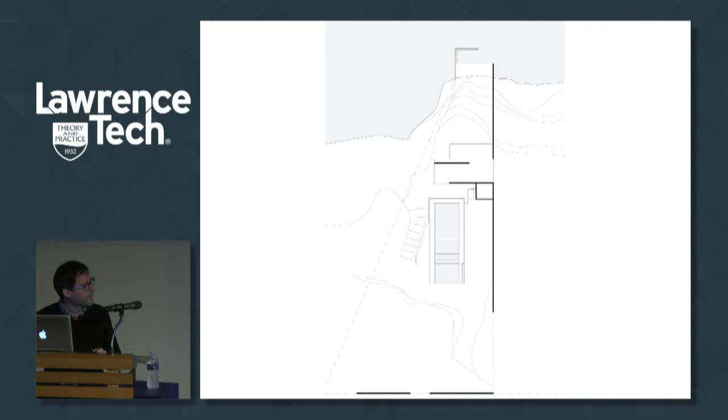And this was the first time that an architectural work engaged with topography, because we're a flat land, and suddenly to start seeing those drawings at the edge of the cliff, basically, it was extremely new for us.

And this is the same year, or actually previous work by Gerardo Caballero, that he did this work coming from WashU. He did his master at Washington University in St. Louis, and he came with this land art sensibility of topography, and that was like a shock for us.

So I'm going to show you the first of my works. I was still at school when there was this opportunity for a competition to reframe what used to be industrial port facilities into a new park, for the city to stop giving the back to the river and start actually using that landscape.

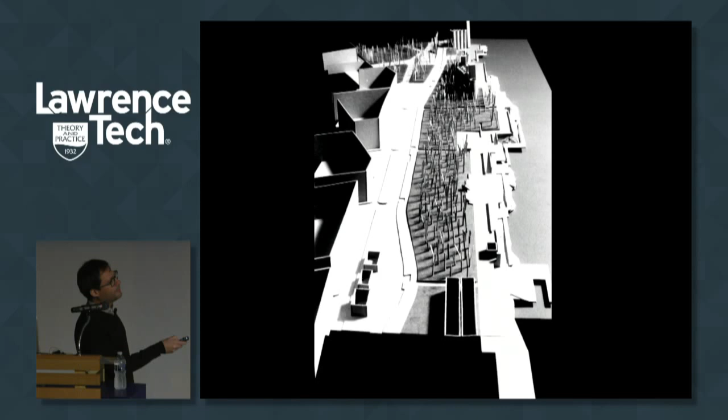And we proposed some kind of surreal scenario of a forest that will frame our relationship with the horizon. And the 5 restaurants they asked for, we put underground. This was let's say the frontal image of what we were thinking, and we were thinking to create a sense of suspense with slight topographic manipulations to separate yourself from the landscape.

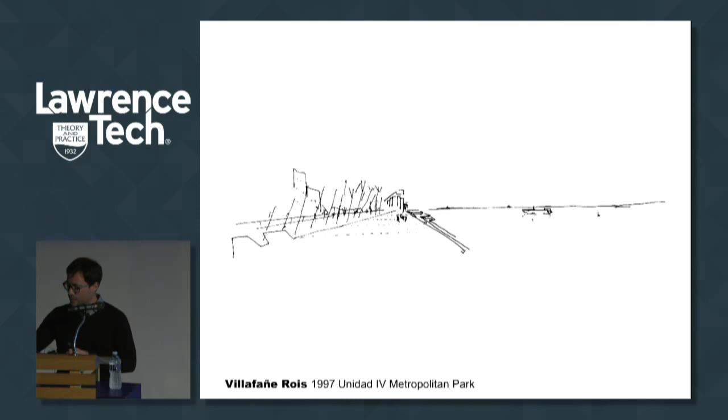So when you are already in the coast, you think you are in a different condition, and you put your body in a clear relationship with the horizon. And this was some silos we wanted to maintain. The city turned them down. We went into the papers and tried to stop them, but it didn't work its way through.

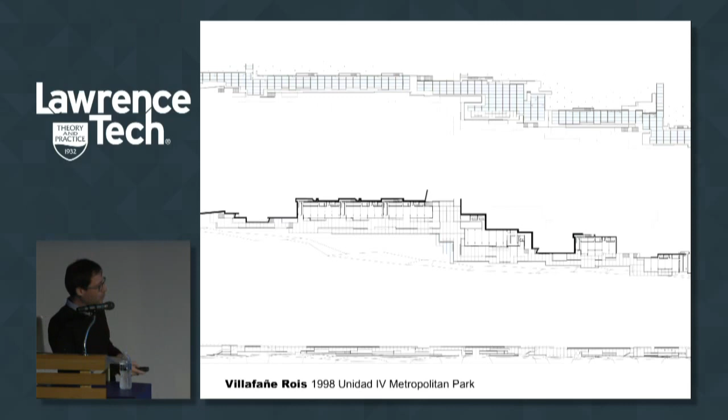This is a very long drawing that I did, still by hand, and this was actually longer than the table. This is the intense work that you do when you do a competition, that you just spend 2 months working on that. We happened to win that competition, and then we worked for 1 year developing the construction documents.

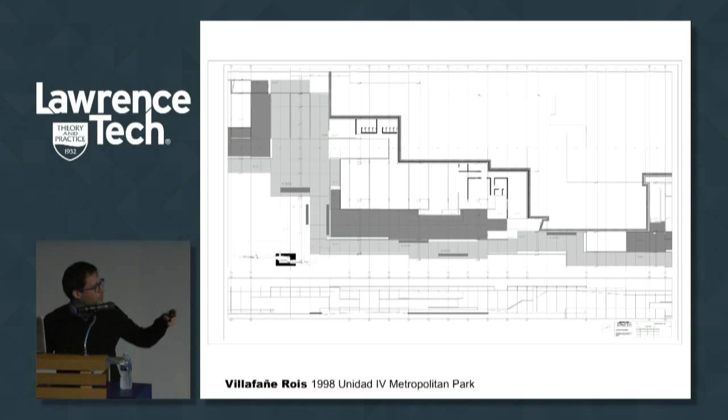It was actually all going to be these, these are documents for legal bids, and we were actually thinking this was going to happen, and so that's why the infrastructure is so simple, just some reinforced concrete structures, and basically this is the public ground.

Some ideas of how to have this idea of people sitting here and never obstructing the horizon with the public furniture.

So that's why this is all terrace. You're always having this direct relationship with the horizon. We worked pretty hard on this. Every one of these sections I show you is one of these.

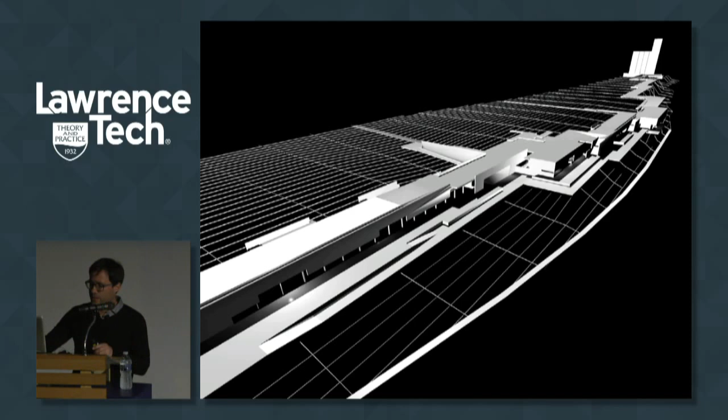So everything was calibrated. We were really hoping that this was going to happen. It didn't, and this is probably the main reason of my frustration with Argentina and my 10 years in this country after that. While I was coming back and forth for 5 years, every time I had the chance to work, I would work.

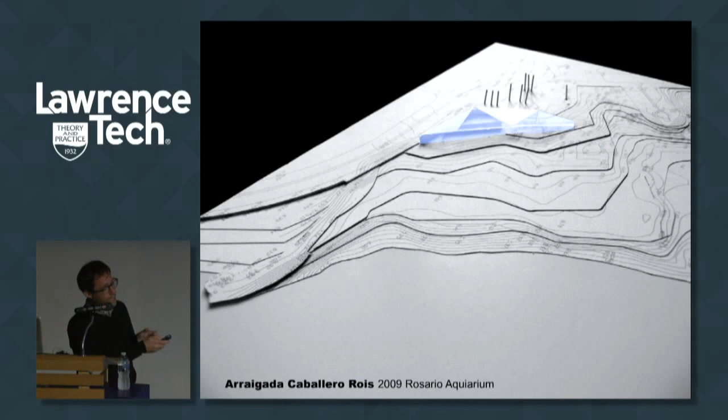This is something we did together with Gerardo Caballero and Diego Arraigada. We got the chance to do this very small intervention in another moment of the coast, just where this big avenue turns into a park, and suddenly this could be the beginning of a public green infrastructure.

So this is basically the site, that's the curve, and we were thinking we needed to think of an aquarium. This was a direct request by the Minister of Science. So we actually were thinking that it was going to happen again.

We really thought that engaging with topography and existing forestry, the building could be the frame of the public infrastructure that relates to the park that is here, and could actually work as a frame to see the horizon, and also engage with the geology of the delta.

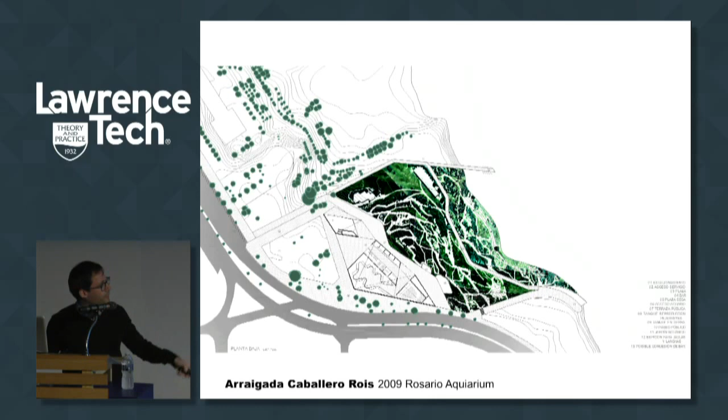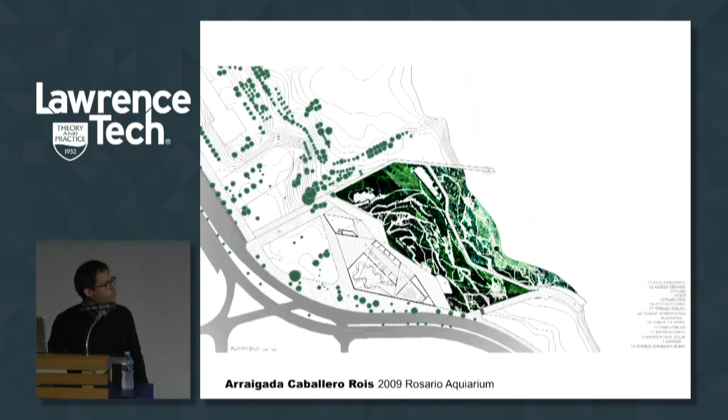Because if this was going to be an aquarium, it was not going to be only about water, but about this interim landscape that we have there, these wetlands. Basically that's a little building, a ship, a little fish out of the river.

Very simple stuff. We were thinking this was going to be still like a warehouse. These are drawings by Gerardo, by the way, very nice. Gerardo will do these kind of drawings, and then we will do this kind of representations of that.

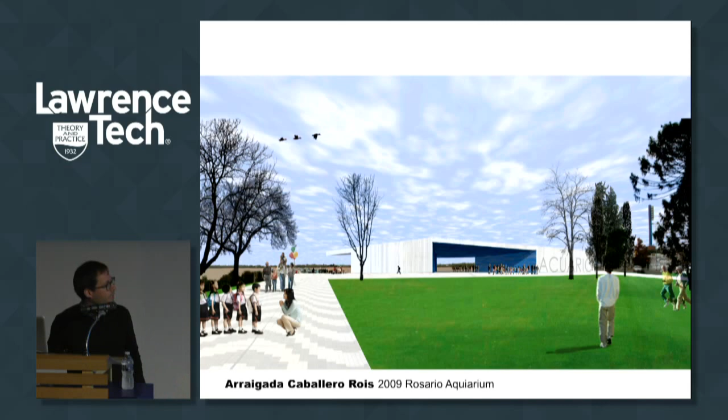Basically this will be this idea of this frame into the horizon of the river. Gerardo will do these cheeky little thingies, and then we will do this, and this will be this park. These are beautiful drawings by Gerardo, actually.

Later on, moving on a bigger scale, we have now this bridge that is the only bridge that crosses that huge landscape of wetlands. It's 50 kilometers of bridges, actually, to get to another town, and this is the entrance to the Pampas.

This is the edge of Rosario, it's actually the corner of the city, and this is another city, so there was this international competition for the creation of a park here, after the bridge was done. I think it's stupid because they already spent all the money here, they will never do this park, but we did this competition anyway.

So the first project I showed you was here, the second project I showed you was here, and now I'm going to show you a project here, really the corner of a metropolitan condition and a fantastic point of view. That's the condition—you're seeing all the coast of the river of the central town of Rosario.

This is something interesting that happens when you look at the river from that high: the horizon gets inverted. Suddenly you're looking down, and the river is actually brown because of all these sediments. But because of the sky, it changes colors every time you see it—sometimes silver, sometimes blue. It's fantastic. Then it becomes like a sky, totally the contrary of what happens in the Pampas, where the actual landscape is the sky.

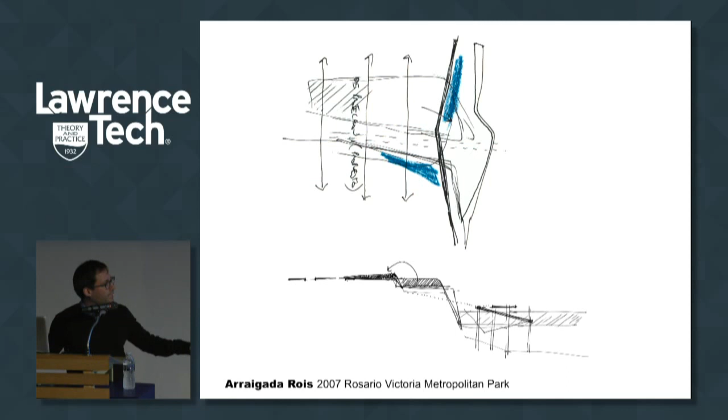This will be our entrance to Rosario, and we will use eucalyptus forest to define the edges of these two towns. So this will be the edge of Rosario, and this will be the edge of that other town, and that's the bridge. With very minor topographic manipulations, we will protect some of the original landscape.

So we will have here a recreation of the industrial agricultural lands of the Pampas, and here something more close to the river. Then the project will just be a road that will try to solve all the problems of parking for this linear infrastructure of public spaces they wanted.

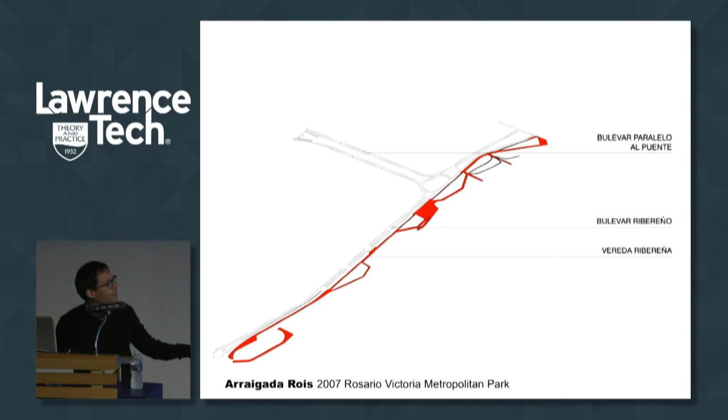So basically this is the existing conditions. We're actually walking on top of the river in the lower level. This will be the forest reserve, and this is the agricultural lands, because we're trying to plan a research facility connected to the university there.

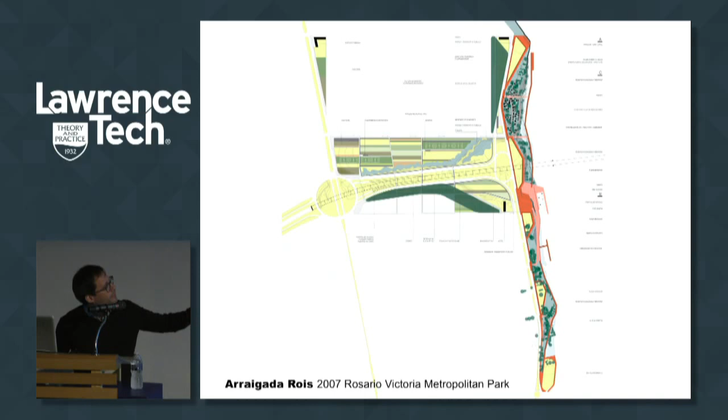And this will be the two forests, and suddenly the project will be that. We were very excited with this, really happy with the resolution of the vial infrastructure, trying to also be very careful with an existing neighborhood of fishermen, and trying to get them to stay there.

Basically the project is just that. It's a diagram that will change, and this diagram will frame different landscapes and urban conditions. And we were reusing the hole that was dug in order to build the park as this big amphitheater here.

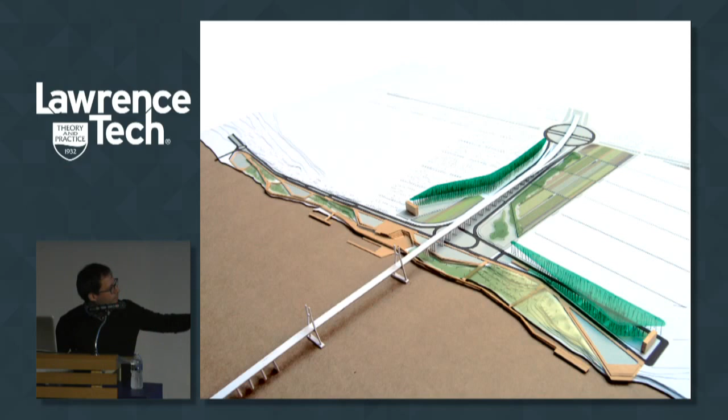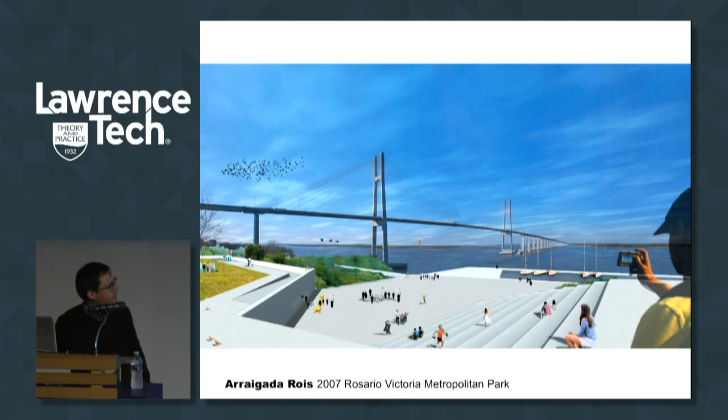This was actually the construction site for the bridge. We were reusing that for this big infrastructure. And then at the end, in the highest point of the whole regional coast, this will be the amphitheater, and this will be the highest point that we call the metropolitan viewing point.

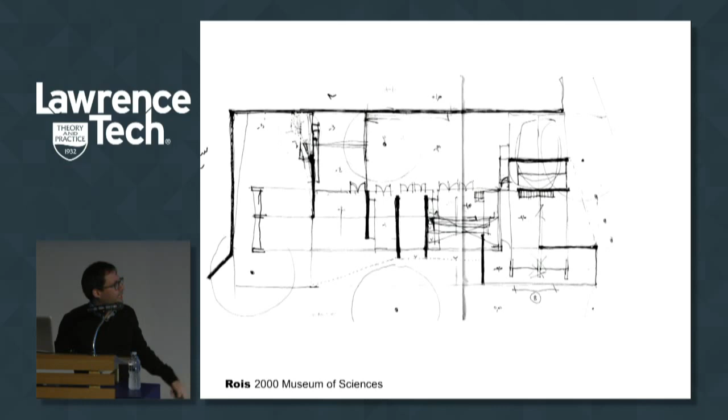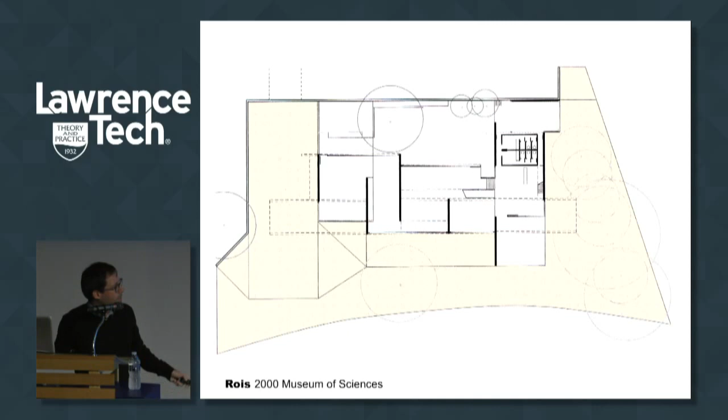So basically, I started thinking about retaining walls as the conditions of my architecture. Some reference - I was thinking that if this was a museum of science, probably something about the lighting conditions, and it's just a way of bringing you down through the museum to the tunnel, or just through the sidewalks, creating this plaza at this entry moment.

And the silo should be here - I don't know why I don't have it. Actually, here, yeah? So the silo will be that vertical sign that the coast is there, and you will be guided by this horizontal concrete beam to get you through the tunnel to the coast.

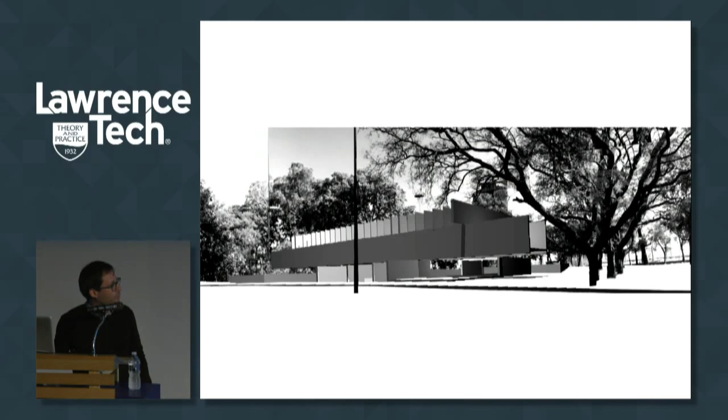So this will be the urban path you will take to get to the lower level of the topography. It's very early work. And then this is the funniest, most unusual block in our city. Our blocks we'll show you later are squares, this is triangular. Our blocks are flat, and this has topography.

And it was a very funny competition. They gave me this site, for the Architectural Association, and I always thought that this was actually a crossing path, and I needed to think that this big building over here was not there.

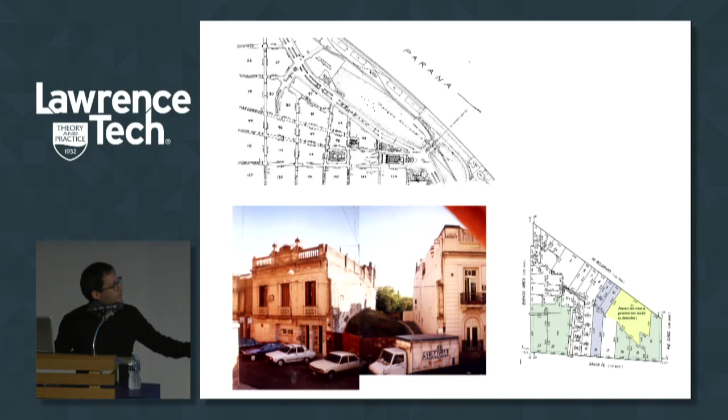So at the end, my building will be the edge of this topographic condition in the park, and it will be framed by these beautiful trees. And in this case, these are not silos, but are the back of a very nice building.

I didn't know when I made this drawing that the designer of this building was part of the jury, and he gave me the first prize. I said, "Architect, you know why you gave me the prize? Because there is your building." That was a joke, actually.

I was thinking this was going to be this concrete thing that will actually come out of the topography, and you will be at the higher level in the city, and then come across courtyards, and then this scenographic staircase, and you will connect with the public level of the topography down there. That was the only model I did.

This is the main monument that we have, the monument to the flag. So it's a double monument, double fascist, like a monument to a nationalistic thing. It's amazing how fascist this thing is, but actually it's a pretty nice building.

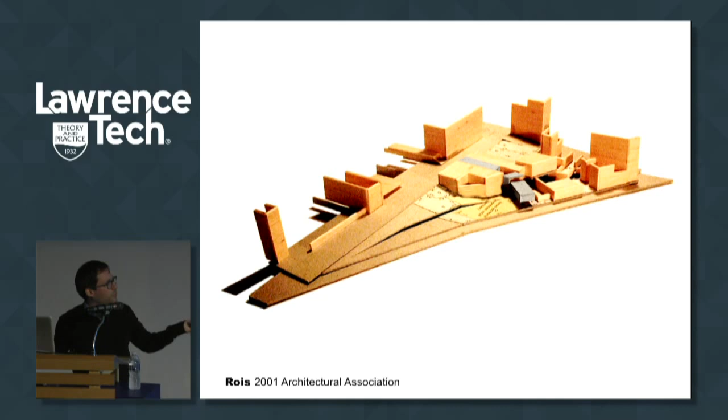I was thinking that I will see it, and basically make a nod to that, doing it horizontally because this was vertical. I will just try to clean a public ground with no structure, using these two walls that I had on the side. You will get to a courtyard, and then to this staircase.

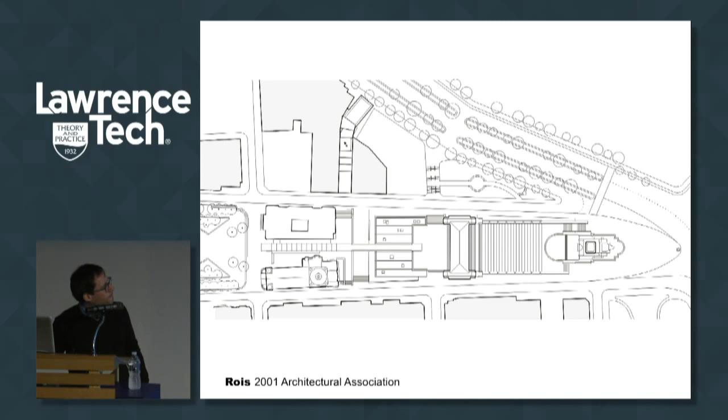I call this machine to view trees, because these are the beautiful trees. So that's the level, and that's the staircase. And suddenly that was the presence of that building over there.

I still don't know how to do 3Ds. So I just thought that cropping the photograph to show how my building will frame the monument would be enough to show the character of the project in the public space.

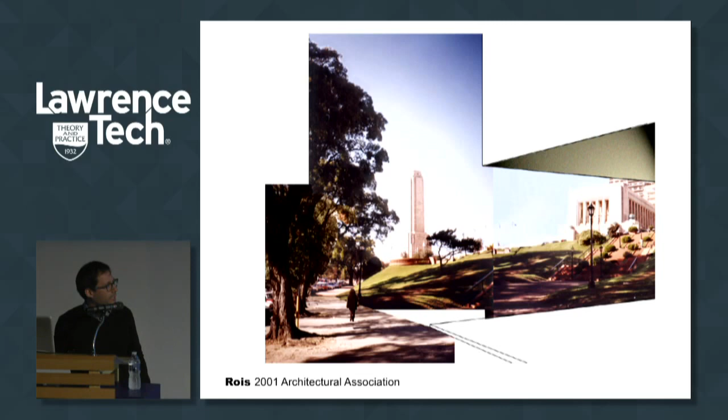And then I did this big model in order to express or show what would be the conditions of those supposedly interesting staircase and halls to the entrance of the auditorium.

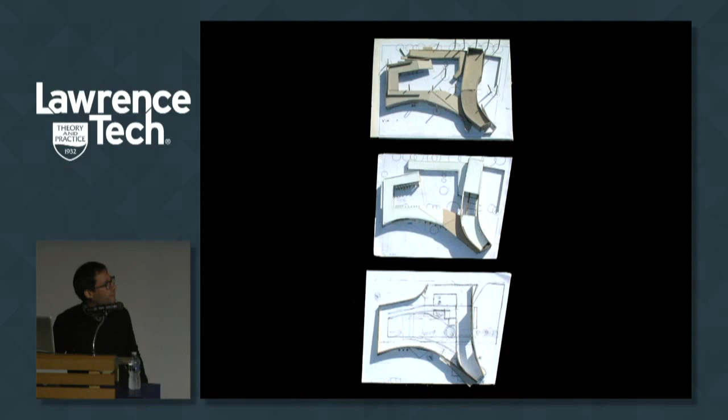Regarding landscape, with Villafaña—probably the last work we did together—we got the opportunity to create this institution, a decentralized municipal agency in one block, a complete block free for ourselves, that used to be a nursery for trees. So there are many trees around, and we tried to think of a soft building, a soft cloister building that will find its way through the trees.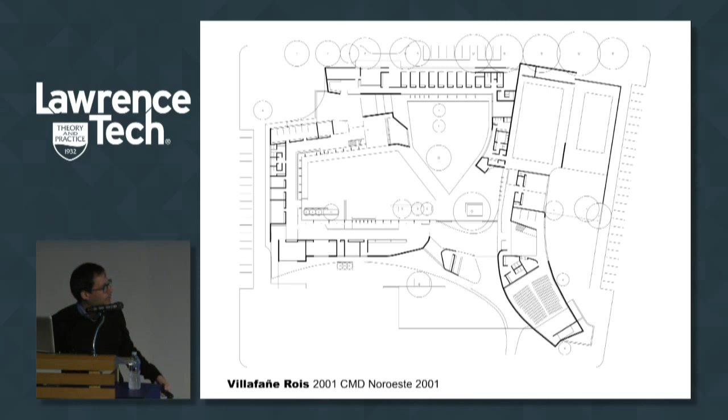We were just 2 or 3 guys doing this, and we passed to the second ground or second level, so we got a bit more time to develop. This is what we presented for the first phase, and this is what we did for the second phase, and this will be the biggest tree—I was really, really excited about this.

I was thinking a lot of Álvaro Siza and his Portugal pavilion, so this will be a very thin slab, and it will be the public space that gets you through the entrance to this courtyard, which we imagined would be extremely interesting spatially. This is supposedly the biggest tree on the site. I still love this project very much.

And this is the only work I have done, built, regarding all this. That's it. You can visit it. It's still there. It's very heavy—they will not be able to tear it down.

I was so surprised because they actually remodeled the whole park, the whole park, they did it again. And I ran here—this is my running path. They were starting to work, developing the whole corner. I was like, okay, my only public work done. But it is so strange—they didn't know what to do with it, so they just left it there. So I won. And this is just concrete, very simple stuff.

I was working in a municipal office for only 2 weeks—they kicked me out. But in these 2 weeks, they were planning a staircase there. And I'm like, dude, the actual sidewalk does that. I'm like, let me do a staircase. You want to do a staircase? Yeah, of course, okay, do a staircase. And I did the thing, I did the model, and I left. 5 years later, they are actually building the staircase. I couldn't believe it—very early work.

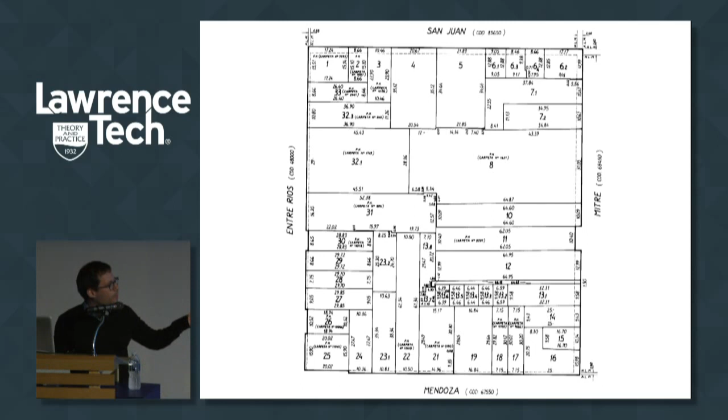We just subdivided more and more and more until we get to this. And this was the only landscape we knew for practice. We took it for granted and never actually asked it conceptually until this came.

I call it the stone. It's a work by Rafael Iglesias that is a renovation of a modern house, and he created this thing that he called a stone between modernism and its fundaments. I thought that was fantastic.

And then this work, this house, is the reason that I am an architect. It was built at the time I was thinking about going to school, and this was on the path to my grandmother's house. When I saw this, I just couldn't understand what that was.

This is a renovation also, of a typical urban typology we have called casa de pasillo, or courtyard house. I didn't understand this at all, and I was fascinated by that.

Later on, my chance was that I worked for 10 years with that guy, and then I knew what was happening inside. What's happening inside is, conceptually, we got these party walls that are just the result of extruding the lot to the sky. And this guy is doing these party walls for fun, just for fun, to call the other ones.

I think that's working with the urban context, that's understanding a condition of practice. This is a house I did, a project for a house just leaving school, a house in a corner. So this is the condition, this is the site you have.

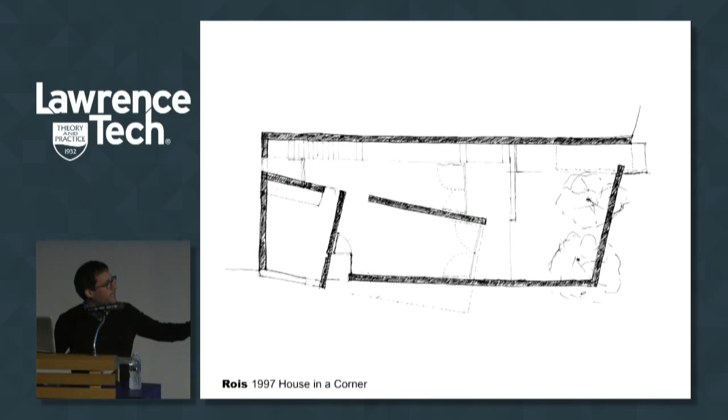You got party walls and internal walls, and you have to work with it, and you can do courtyards. In this case, the courtyard will not be at the back of the lot, it will be at the corner. I'm working with very slight deformations to get a sense of spatial continuity inside and outside.

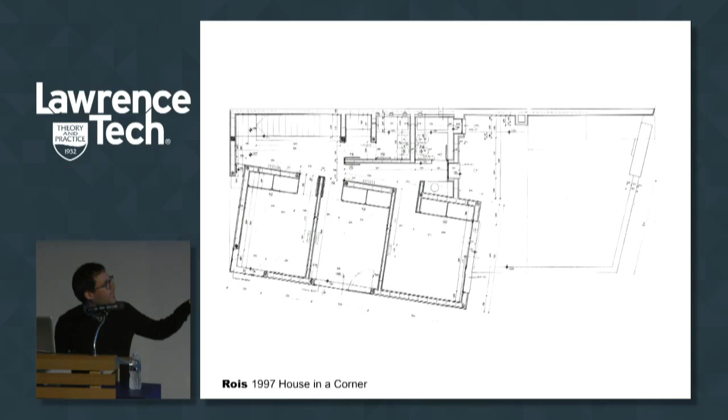Especially the opportunity to work on the staircase with skylights, to actually light that space up with a crack on the house, so you get light there, and trying to bring all the doors together so what used to be a dark space will actually be the most activated space of the house.

And trying to complicate your life as little as possible constructively, because you're out of school and you just don't know how to build. And then to actually allow the party wall of the other house to accept it, and make it work for you in the outside space.

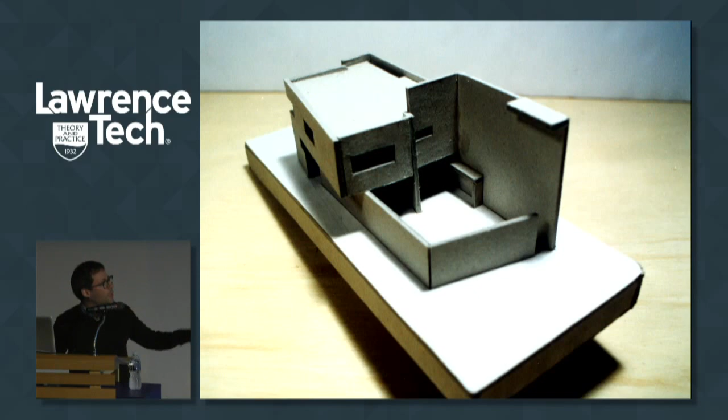This is the first work I did with Villafañe. It's an interior renovation. They gave us this space empty. We hung these two I-beams, and from those two I-beams we did this slab.

From that we hung this bridge of plywood, reused plywood that we just sanded and painted, and it was great. We also got the space for a spiral staircase that we were supposed to design, but the client actually hated spiral staircases, so we came up with this instrument to get the guy up and down.

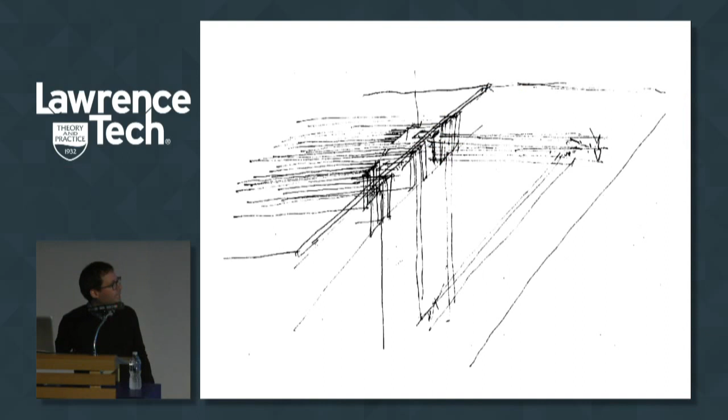Suddenly the whole thing was working with this system — this is the sliding partition that divides his bedroom, and this is the fixed partition that divides the bathroom, and we were really happy with that. Then I was just having fun doing furniture with that.

This will be the breakfast table, and it will move. We were so happy with the system that for the next project we had, we actually extended it into a whole renovation of a house.

We turned out things that were here and moved the kitchen here, basically opening up the whole space in diagonal views to the beautiful trees that he had. This is our national tree called Ceibo, and this is the Palo Borracho.

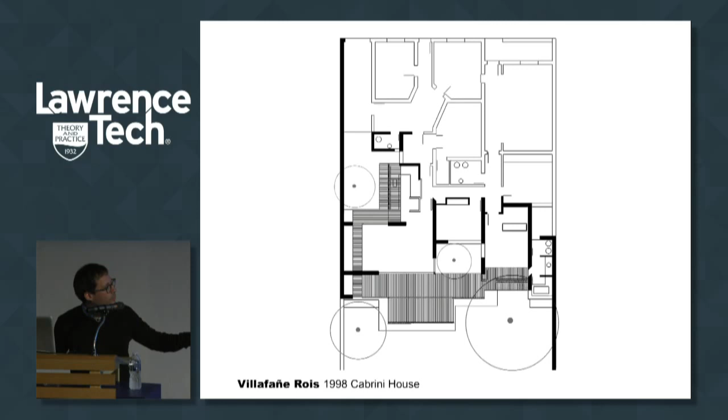Two beautiful trees — he had them in his backyard and never saw them, and suddenly we are trying to make him see everything from it.

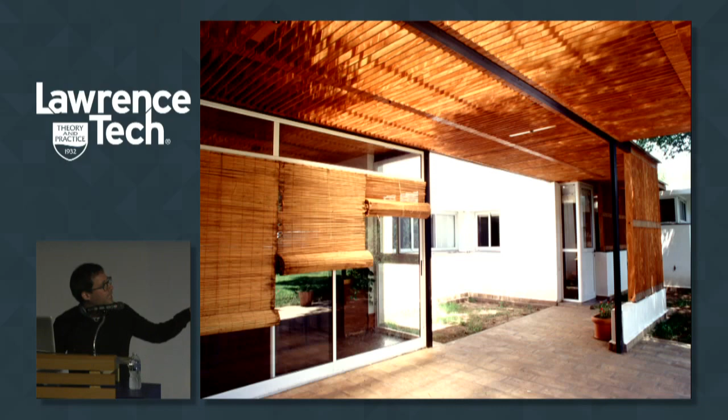So this thing will actually help you get through, and on the back you will have this beautiful yellow light, a little bit like the fall light you have now because of the yellow leaves of your trees. And then you see the connection of one courtyard with the other there. This is the entrance of the house.

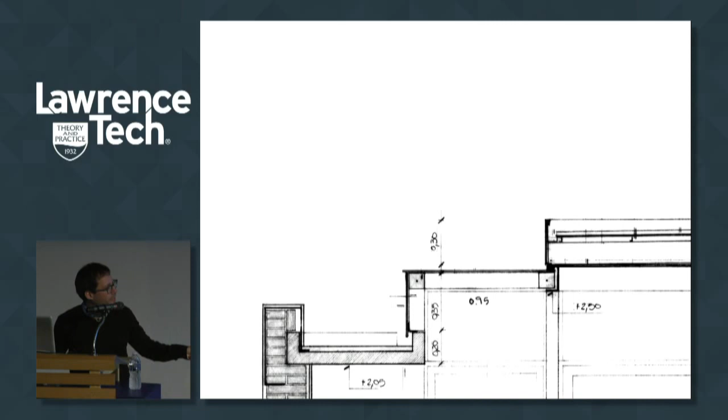And yes, we were doing everything by hand, and these were construction documents, and this leaked for years. So don't do it, it's bad for you and for the client as well. But the lighting conditions of those things were actually really interesting.

And then we did a couple more houses working with that system, because with steel beams you can actually make it pretty flexible. This is an urban house with a weird condition.

I don't know if I have time to explain this, but there are two kinds of lots. I should have explained you that before, but in colonial times the Spanish Empire had these rural divisions called lonjas, and they were orthogonal to the rivers, very long lines. So the city is skewed a little bit from those original lines. Whenever you see a diagonal in the city, it will be those, and probably you don't recognize that, but the street is actually running this way. So basically this is diagonal. It's weird to explain that.

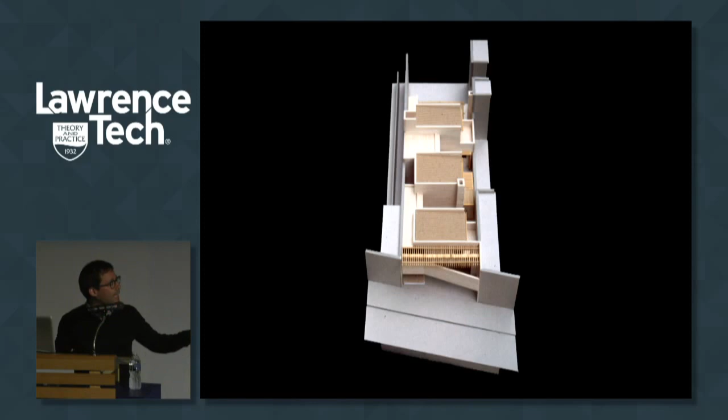So this is a very deep lot, and the client wanted a chalet that is like a brick house with a pitch roof. So then we said, okay, brick is too expensive, so we're going to plaster. Okay, plaster, and here is your pitch roof. So we totally lied to the guy.

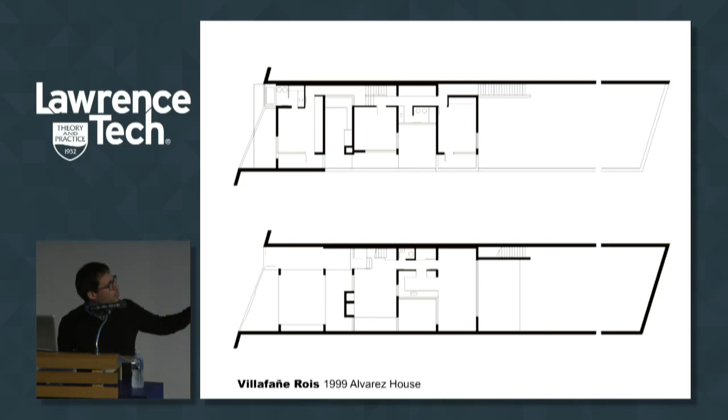And then, okay, we have these very tiny courtyards that are not following code, and we use this as the coding mechanism. Because this is north, this is the best orientation, and every room has its own little patio. And then we're actually working with the difference between the diagonal of the city in relationship with our lot, because we're orthogonal to that party wall.

And suddenly there is a point in space that will change every time you walk past it, and it's a comment on the difference of these two urban rules.

And this will be just, we didn't hire a photographer back then, these are just our photographs, so they're a little bit rough. But what I like the most about the house is that, I think this is the neighbor, and this is us. So I think that the house understood a clear relationship, like a good neighbor relationship, because you will say hi to the guy when he wakes up in the morning.

This is very recent, well, not so recent. I only got the chance to do an urban house one time with my sister. This is already the firm that we have with my sister. She is the boss, I don't want to claim any kind of credit, she is the boss.

So this is a very simple lot, and I was thinking, and she's an engineer, and she will actually work there. So I'm like, okay, that's the lot for the house, and that's the lot for the office. So I got a lot within a lot, and I thought that was great.

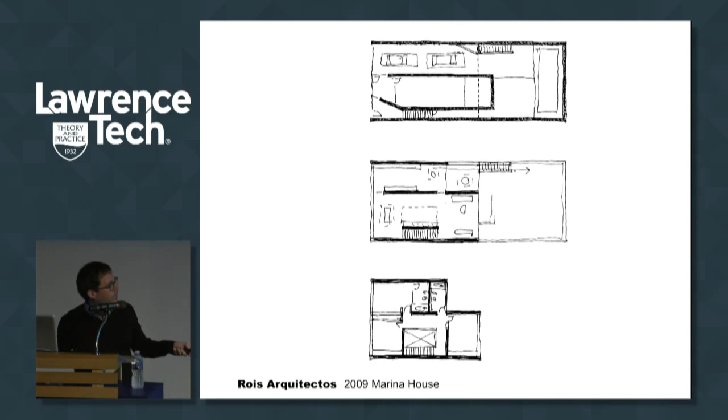But the thing is that there was an existing house there, and she's an engineer, she calculates the structure, and her husband is an engineer and a constructor, and they were like, let's just do a renovation of what's there. I was like, oh.

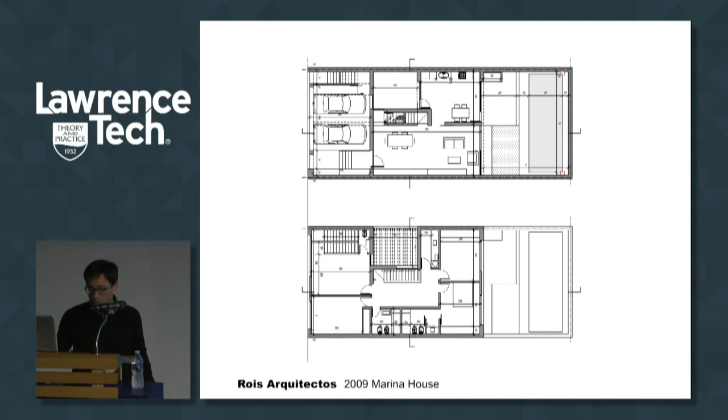And there was this party wall in the middle, and it was so insanely difficult to place this staircase here, because this is the structural line of the old house. So we were really trying to get our heads around it, and basically this will be the new

reinforced concrete beams, because I was also trying to light up this space. And I was thinking that this column would actually create the space to connect the kitchen and the staircase, and then this would be shorter, so light will get through.

But we didn't get to do it at the end. But we actually defended that window there, and that as a glass door, because I was thinking that this was going to be very dark. So this photograph by Walter Salcedo is actually pretty helpful because it's not dark.

And basically what we did is put this insanely huge window on that staircase, and that would be the mechanism to actually highlight this moment over here and that moment over there. So it's a pretty simple operation, because actually we were working with engineers who were building their own house.

But we managed, here the kids are actually working here, because this is where they do homework and stuff. And I think it's a pretty decent space. This is the connection of the courtyard, and this is where you have to actually be friends with the party walls of the others, because that's your urban condition.

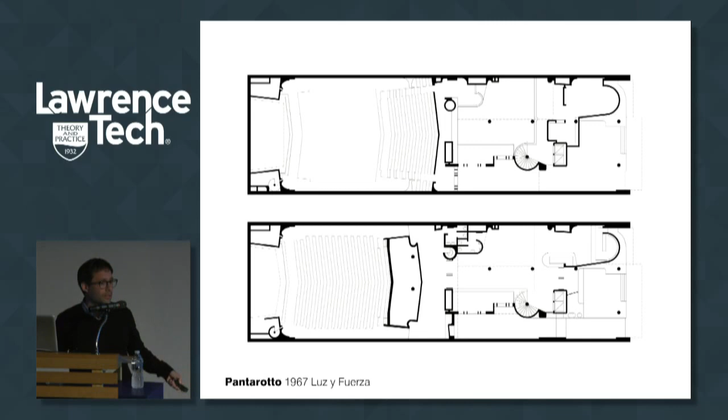And funny thing is that institutions, we do it the same way. We actually put it inside party walls, because we don't have any other place there. And this is a big institution. It's actually a union, a worker union, so it's a very Detroiter thing. It's a health insurance and all that, but it's actually luz y fuerza. That's called light and force. They are the electric workers union.

And this fantastic building is by Augusto Pantarotto, a little bit older than us, but also a big figure for us. This is just this heavy institutional building that behaves so nicely in the city, and then you will enter through these small spaces, and then it will open up this interior space, almost like the interior space of the block, and then you get this lighting from north and south.

It will be fantastic. So when we got with Villafañe to do this competition for another institution, we were thinking on that. Actually, I didn't realize we were thinking on that. I just realized that when I was putting these images together. We were just having fun saying that this is the form of the lot.

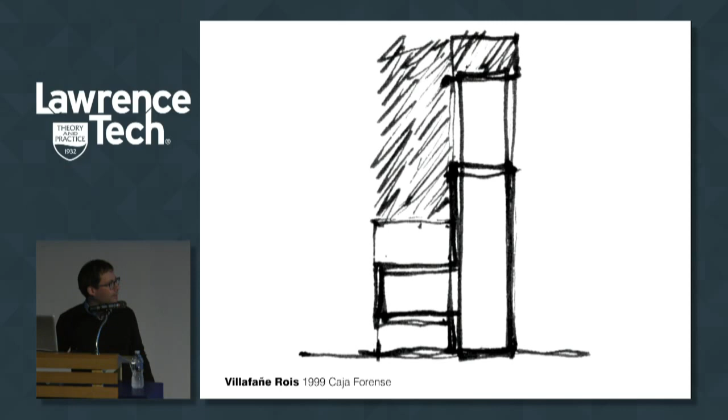And we were saying, okay, what if we do a plan that is like the section? And we were like, yeah, that's cool, let's do that. So this is our section. It's a 10-story building, got some banks here, some cultural moments here, and then offices to rent up there.

And then we did this balcony thing in which one big space will look into that other big space. So that will be the interior section. And that's the plan, in which there is a hole, a very kind of volumetric hole in the sidewalk that is here, that will bring you down. You will be in a lower space, and then you will suddenly be in that upper space.

And this is what I'm telling you, I actually realized when I was putting this lecture together. It's actually the same spatial conditions of this precedent that we have. We didn't think about it, but it is there. So our conditions of practice include this reverence to local precedents.

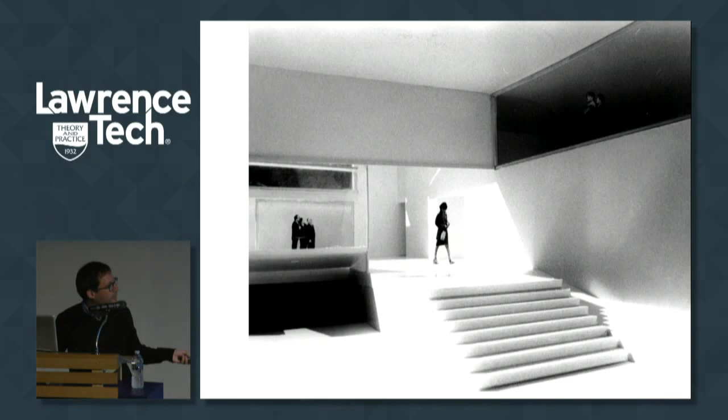So then that will be the sequence. This will be the entrance on the street, and then you are up here looking down, or you are down looking up. And then also putting this lecture together, I realized that this is the last big project we did with Diego, and it's a library. And I sense that 10 years later, it's like you don't learn anything. You just repeat things that you did.

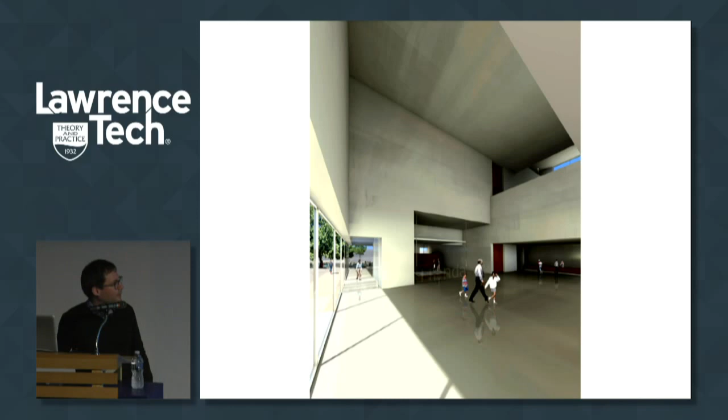It's crazy. So we were doing this competition. We didn't choose the site. We thought it was a very bad site, and we were supposed to do a bicentennial library to celebrate our 200 years as an independent country. I think that we should cry, not celebrate, the way that we're going.

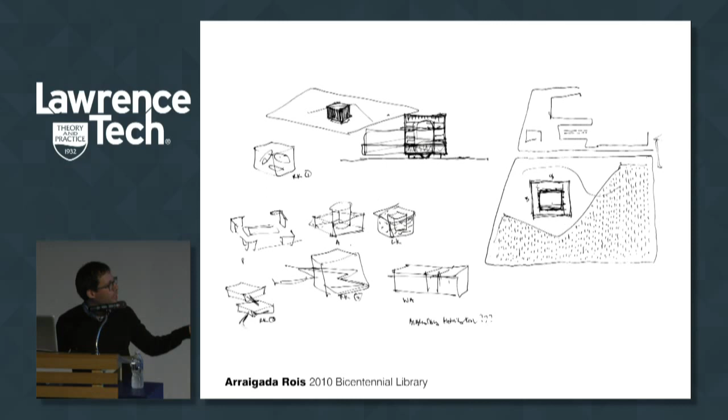But we were thinking, okay, let's just do a cube. Why? Because the most beautiful libraries that we know are cubes. And let's just try to do our own cube.

And this is Álvaro Siza's building, a very nice building. That's a courtyard he has on the main avenue here, but he has this entrance here. That's actually the front desk, and he has a back door here. So you can actually cross the building like that.

So we're thinking we should establish this relationship. So that's why we moved the building a little bit up. And then we're thinking that we're gonna do a forest. We're gonna plant 200 trees, and then every year we will plant another more. And that will be the way to celebrate the bicentennial.

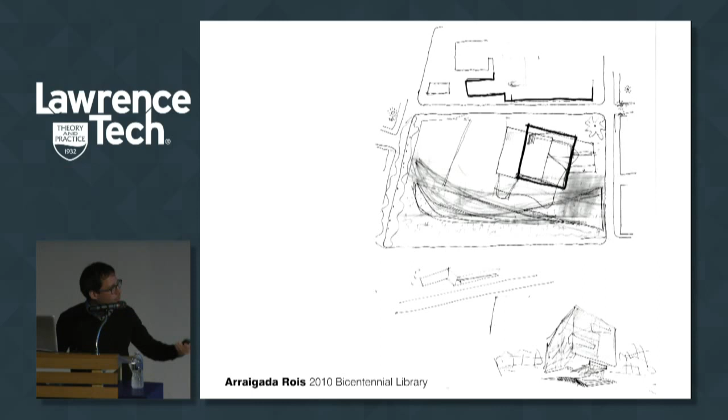And we were thinking, working on beams, a little bit like my previous museum I showed you, but this time we will try to organize the central vertical infrastructure, and these beams will actually crisscross and move like a clock every 3 hours, and this is the work you have to do when you do a competition.

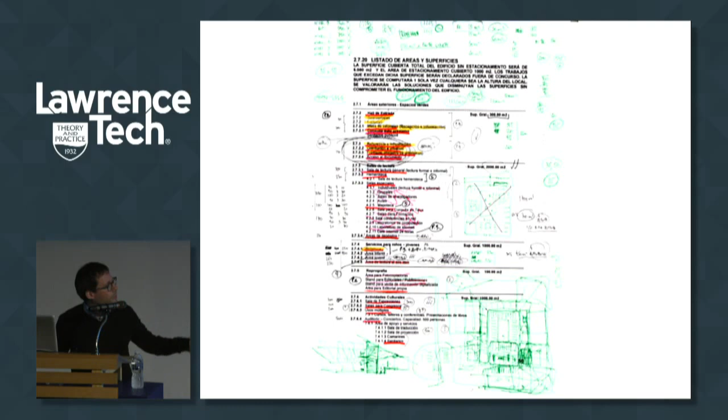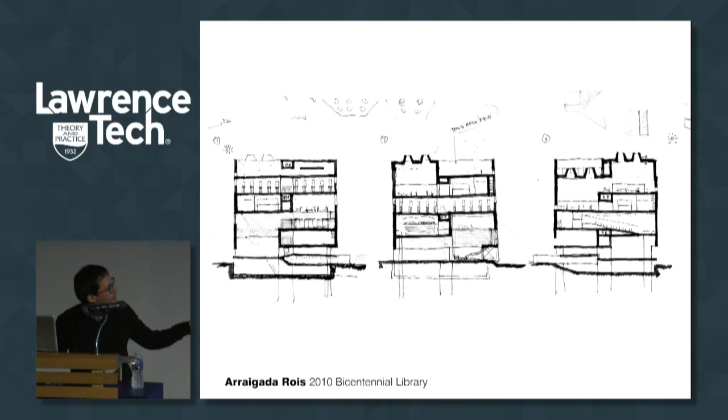You just basically pretend that you care about program, but then you don't care. And you try to solve pretty much everything in plans and then work through sections, and it's like, yeah, I keep doing the same things again and again and again.

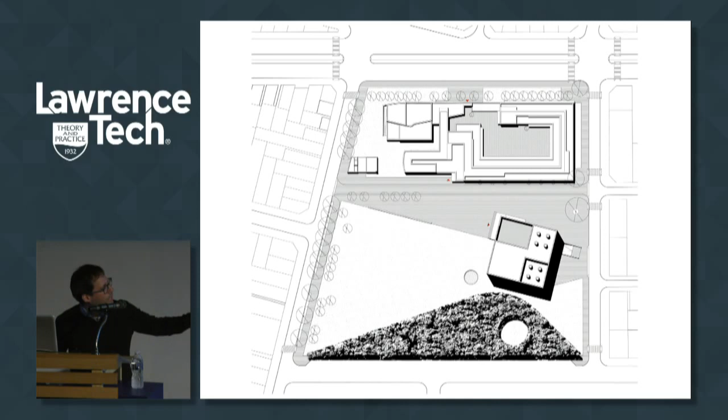Plans, and then you have to give the character to the building, so you actually begin to create this monster, soft monster, creating this plaza that of course is a backyard plaza, but we were trying to create this pedestrian, basically a little bit like a forum of public buildings. We were thinking that this monumental condition was strong enough to celebrate 200 years and stay for 200 more, and that's the forest that will soften everything, and the plants.

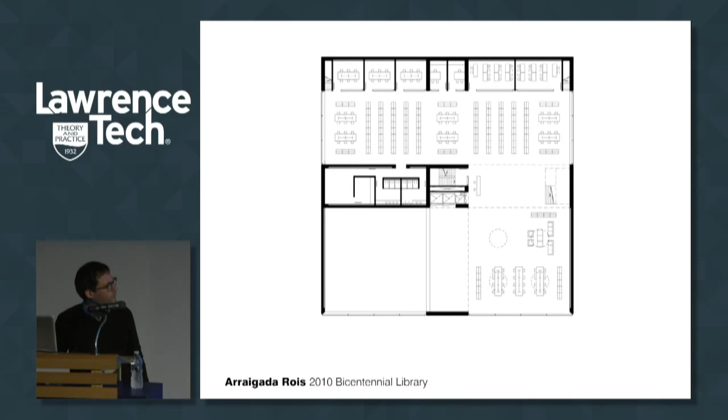I think it's quite funny. And this is the thing, right? It's just, I didn't even change the way of drawing it in 10 years. Totally insane. I realized that last week.

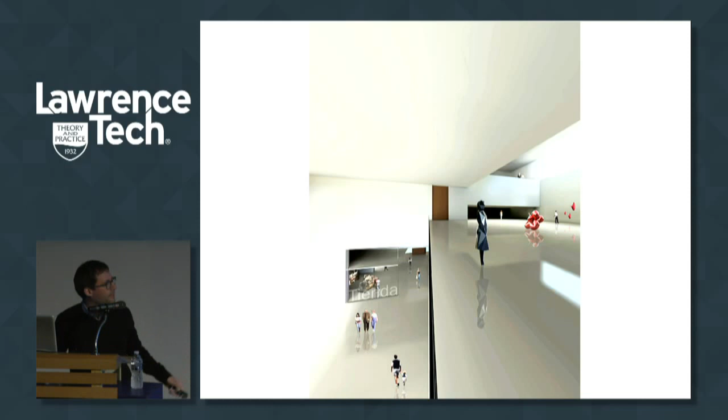So this will be the sequence of public spaces going up. They will go up and circular around the building. This will be the main hall. Then, let's say, this is the entrance to the auditorium that is here, and this is the exhibition hall, and then you're looking to the hall, and that's the entrance to the actual library. So at the third level, you will be in the library, looking at the exhibition, looking at the hall, and looking at the street and the city.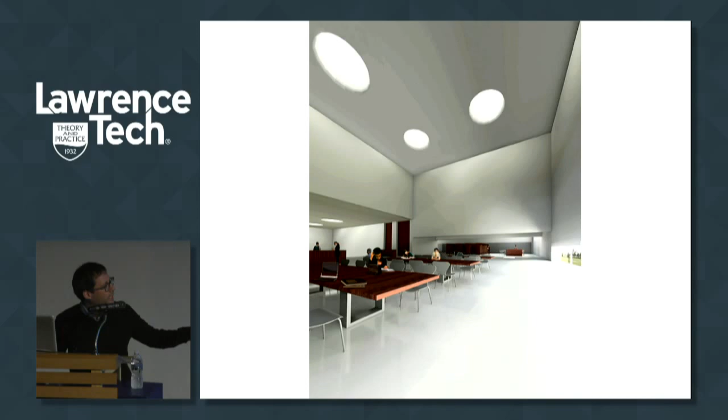And that's the other library. We divided two lecture rooms, one for fiction, another one for science. And in the reading rooms, we will have these very low windows looking again at the horizon of the city.

Which brings me to the last condition, also a very recent one, that relates to the suburbanization of our town. We used to be a very urban society. Now people want to live here, they want to escape this and live here. And developers are actually selling something that doesn't exist, because this freedom does not exist, because this is going to become this, but worse. Again, we were looking at certain works that open up the disciplinary questions to ask on those conditions.

This is an early work by Gerardo, working on rural prototypes, galpón. This will be like a warehouse, or actually a galpón, a metallic warehouse.

This is pretty recent work by Gerardo. I show this because I write about this. All the works that I show, I have articles written about, so I think about the work, and I think in a way it influenced my work too. This is like a big screen, and also a space that when you are inside, it puts you back in the horizon. So it's always framing the horizon.

And this is the first house in that condition we did with Villafañe, and this is what I'm telling you that it's a lie. This is actually a block, an urban block, it's just that it's not developed. So I was able to take this picture 20 years ago, but now it's impossible because there are 20 houses in between where I am standing and that house. So it is an illusion.

Developers sell an illusion. And this is a very basic house. We're trying to do just a very simple rancho, that is the popular typology of the area.

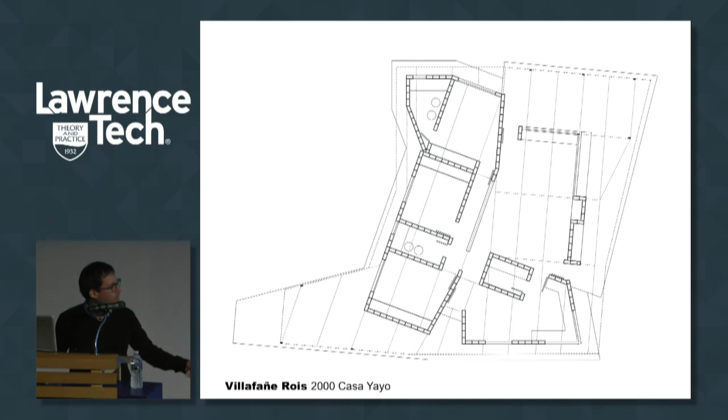And then the thing is that we devised this system in which the roof will have a steel structure, and then the house will be retaining walls, load-bearing walls. We were working with concrete blocks here, that these are just concrete blocks painted. And they will work also on the outside too, because we have a climate that actually allows for that. So we'll just use one single block, and we'll fill it with something, I don't remember what it was, but that will give you enough thermal protection to work through.

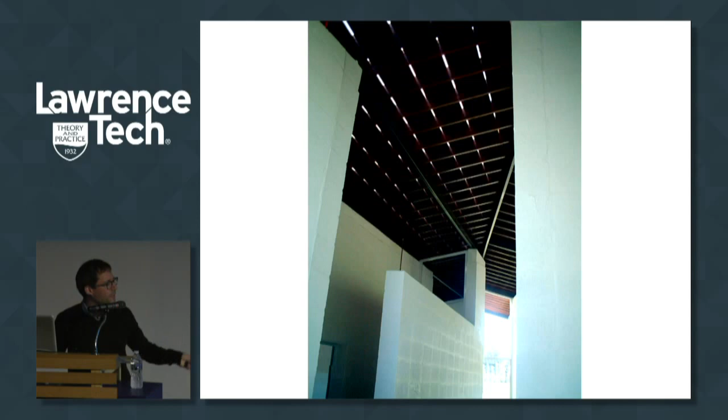So sometimes this will go to a column, metallic column, and sometimes it will go to the load-bearing wall, but sometimes it will just do its own thing. And that allows us to actually frame, and also this is a very decent height, probably 5 meters, so it's really tall. It's a really fantastic, I think really good space.

And then you will have to frame and do what you have to do in the Pampas, that is to create a little bit of shade, because we're talking about 100 Fahrenheit in summer, so really, really hot and humid. And this was under construction. I got stories about this roof that flew away by a hurricane one week before the client was moving. This is true, but I have to talk about that for an hour, so I don't have time.

It's a very, very simple house. And I was also happy to see that they actually relate with a house that we did with my sister years later.

This is actually an urban house, but it's at the edge of town, and it could have this relationship with the horizon for 10 years before they develop the city there, because there is this huge developer-driven urbanization that is going to come here.

But at least the client could actually enjoy a little bit of that. And because it's almost a cul-de-sac, you will always get to the house from this direction, so we're thinking to make this little indentation of the house so it will change, a little bit like we did in the house inside the city. It will change the moment that you approach.

And it will just have this funny roof there, and a big window towards the sky, towards the sunlight of the afternoon, and a door inside towards the sun of the morning.

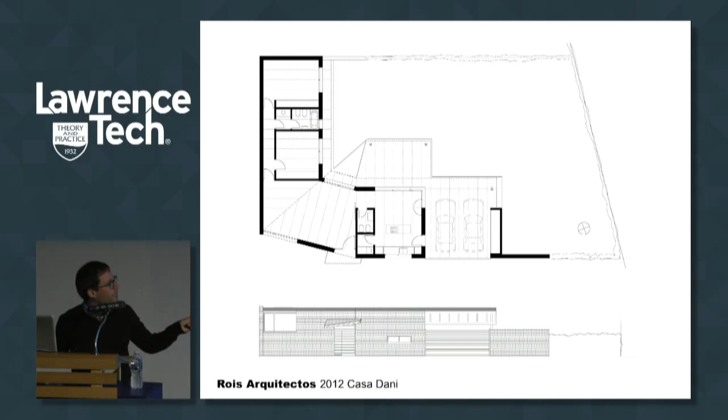These are photographs — I think I'm still a little bit amazed with only one geometric move. It's a very simple house with just 2 parallel lines that work against the orthogonal organization, and just 1 diagonal that is almost like an encounter diagonal, something that comes for free. And suddenly that creates these spatial variations.

This is because this is public space and people will see it, so you put it high and you see the trees. And this is down because it's your space and you will see here the horizon.

These are photographs by a professional photographer, and these are my photographs of the actual space. The client was so happy.

I really think we should be seeing more of these photographs in architecture school to talk about domestic conditions and how people actually use the spaces that we create for them. And I'm really happy that she's happy in this house and still maintaining every day this relationship with the horizon.

I'm going to show you very fast, as a movie, the last work we did together with my sister, to actually scare you to death about the conditions of practice in Argentina.

I love these clients. They will actually believe us 100% of the time. We never changed a drawing because of something they told us — they accepted everything. I actually had to fight with my sister, because I'm like, let's do that, and she's like, no. I'm like, the corridor, 1 meter. Bathroom, 1.5 meters. So she is definitely my boss.

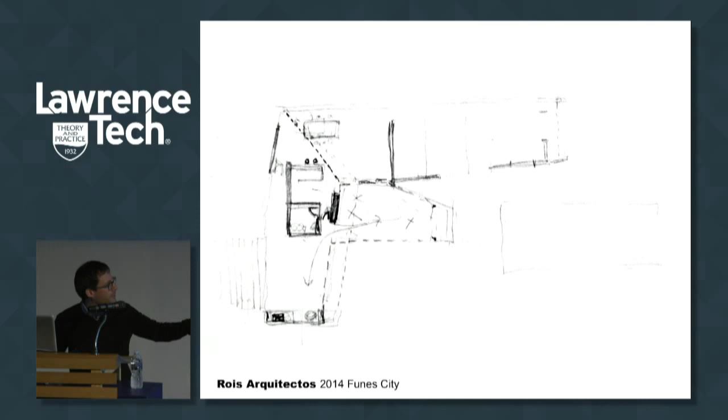This is for actually 4 cars — 1 car here, 1 car here, and over there — because these 2 guys have cars and have kids that have cars, who will visit them during weekends. It's almost like a retirement home; they're actually going to live outside, trying to enjoy their final years of life there.

So we couldn't do that diagonal. I'm still crying about it, but I think that this could come into another work. You always want to carry something for another work.

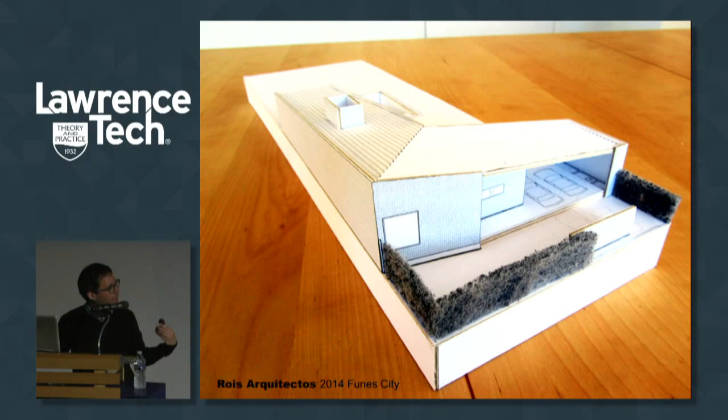So this is actually the resolution, that's the final plan, and these are construction documents. With these kind of drawings, you go to the field and you build it. So I'm gonna show you very fast one year of my life.

Again, this is the beginning of that house. This will be a greenfield development, but we know that another house will come here very fast. So it's not that you're doing a house in the middle of nowhere, you're doing an urban house. That's why we actually trust in party walls in a way.

So the first thing that you do is pretty much make the drawing of the house down there, and then this is very fast. In one month you have pretty much the foundations, and this is supposed to be a photograph there.

Basically that's what you do when you go to the site - actually I take pictures, my sister negotiates, because this is a construction company owner, and this is the guy that is doing the work on the field. We're trying to defend the interests of the client. You're actually in between the clients and the construction companies.

This is we have this double wall. This is the inner wall with ceramic tiles. Then we got the protection in between and all the systems and thermal protection too. So you will see the inside house, and then the outside house, that is the brick wall, comes slowly, and then you put the beams there that wait for the brick, and finally four months later you got the bones of the house.

We build exactly the contrary of you - we started from the outside and then we go inside. And well, they're starting to put the roof, and the same people, this guy will do everything.

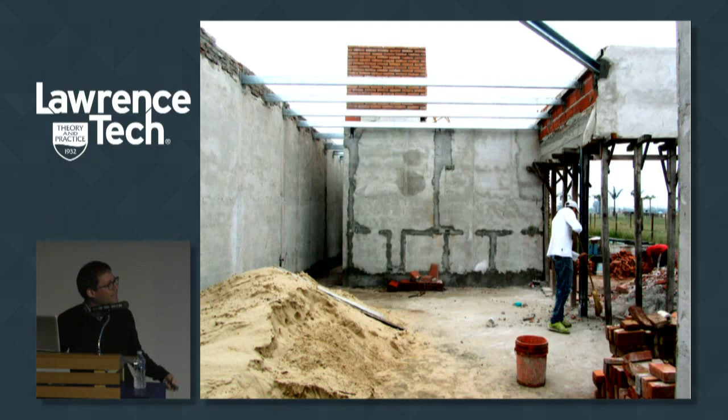I will come and he will be there. He just built the whole house by himself. Some subcontractors, especially for thermal protections and ceiling.

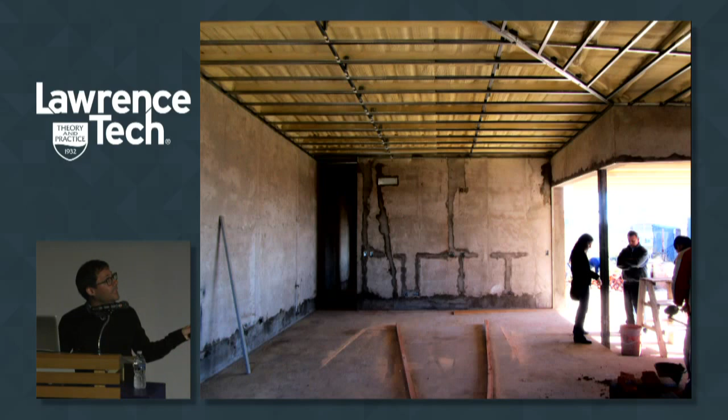And when I got this space, I'll come down. I think, okay, we got the bones of the house, and the bones are right. These are like four meters, so this is actually pretty high space. And I'm seeing already, we're in the middle of winter, and houses under construction are actually pretty dark and humid. And suddenly this was not dark at all, and I was like, this is gonna work.

And so that's the boss controlling how bad they will do this. They do it pretty badly, and I was not happy with that guy in December. Now I'm really showing you one year in which you go twice a week to this site - that is one hour drive to the outskirts, one hour back. So you actually spend a lot of energy here, and if you don't go, they will put the window in the wrong place. So you have to be there.

And when they put that, actually it was like that - they built the wall until here. I'm like, dude, there were three windows there. I'm like, oh, it's really crazy. No, it's not funny. It's really not funny.

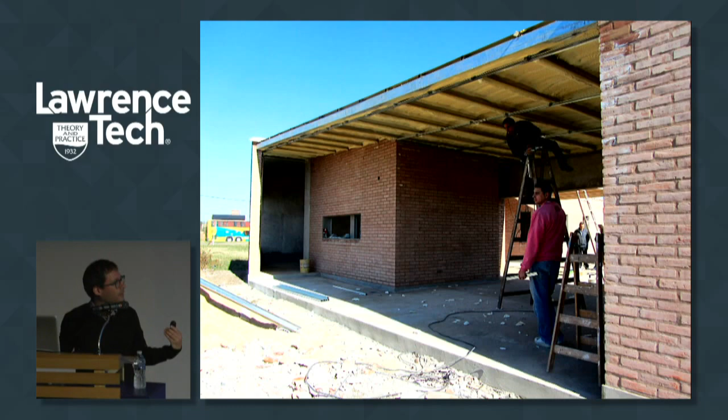So I think the client is not mad at us because this is a nice house. It gives a sense of scale and dignity to that house.

And so that will be the sidewalk. This is the setback. There will be a fence here that we thought was going to be a green fence. The client at this time is broke, completely broke, he doesn't have any more money. So all the landscape - and Peter will actually understand this - all the landscape that we thought was really important for the house, it will never be done, actually.

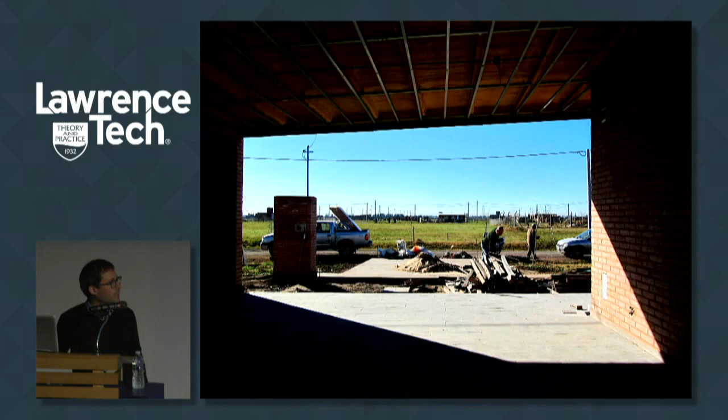I think giving a dignified entrance to the house will help the client, and framing as much as you can the sky and not the neighbors, because here there will be a very ugly house. So you will put your fence here, this tall, so you will see just the sky. You will frame it, and also with the window, you will have your tree here, and your green fence, and then you will see the sky a little bit, trying to get into that horizon thing.

But look at this, this is actually pretty tall. That's a guy working over there. So that's the light for the winter morning, this is the winter morning. So I imagine that having breakfast here before going to work, it will be okay.

In here, I imagine that the client is preparing coffee and having his mate in the morning there. That's the sunlight of a winter morning. So I think the space actually works pretty well.

There was another picture here, and suddenly these are the last pictures that I have. I don't have real photographer photos. Also at dinner we can talk about it, there are some issues more important than architecture, and I didn't feel I should go disturb this guy one day of his life to take photographs of his house.